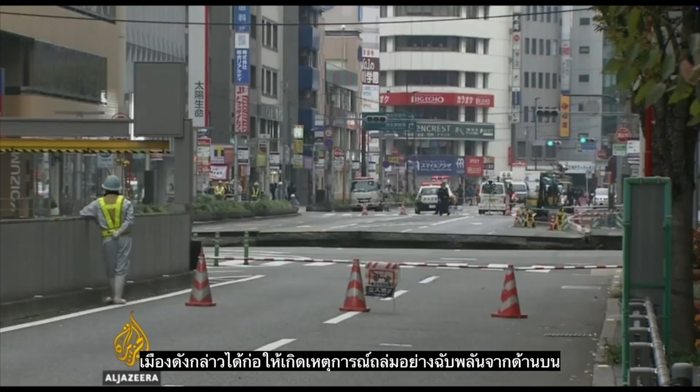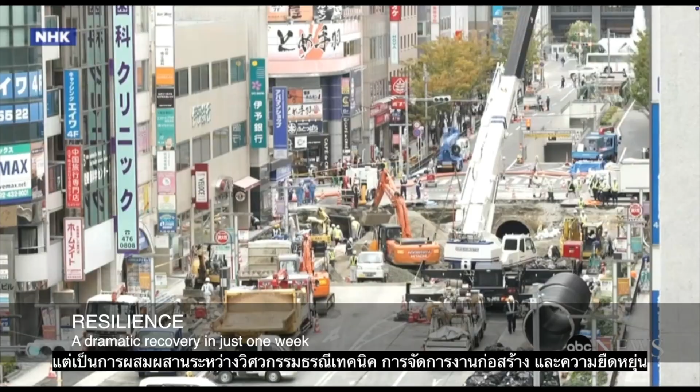In 2016, in Hakata, Fukuoka, Japan, a major road collapse shocked the nation. A tunnel construction zone deep below the city triggered a sudden cave-in above. In seconds, one of the busiest urban spaces was transformed into a crater. And yet, in just 1 week, Japan demonstrated something remarkable, not only emergency response, but the fusion of geotechnical engineering, construction management, and resilience.

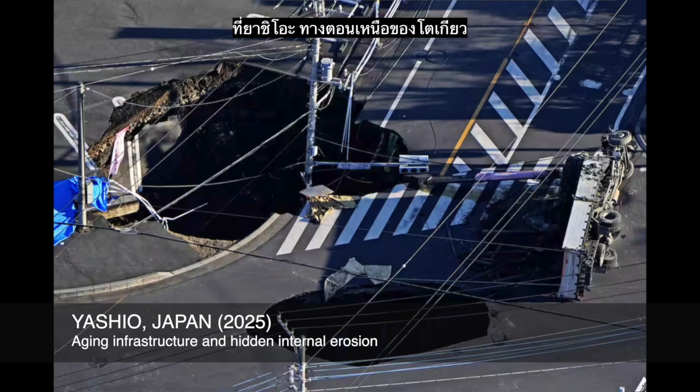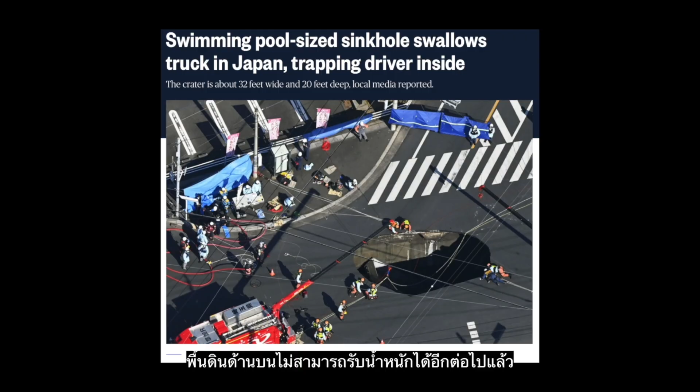But the threat is not limited to construction zones. In Yashio, north of Tokyo, aging underground infrastructure quietly created the conditions for disaster. Erosion advanced in darkness until the ground above could no longer hold. Invisible decay, difficult to predict, devastating when it finally appears. This is the new battlefield facing mature cities around the world.

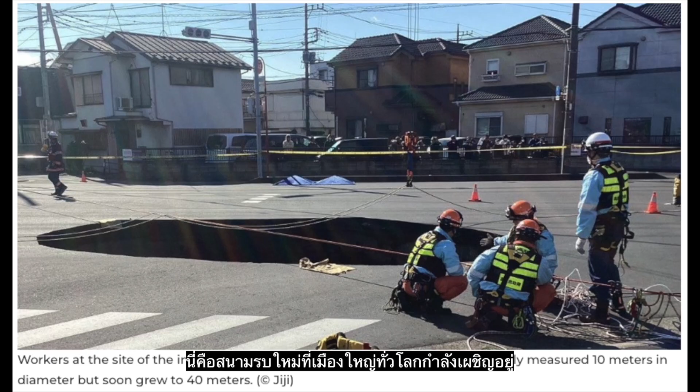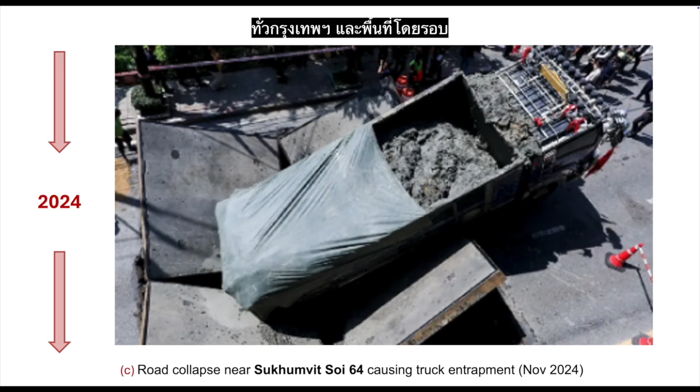And now, the stage moves to Thailand, a nation of rapid growth, complex urban infrastructure, and some of the softest urban ground conditions in the world. Here too, the struggle beneath the surface is intensifying. In Thailand, what we are seeing is not a collection of isolated accidents. It is the emergence of a pattern. Across Bangkok and its surrounding areas, pavement collapse, sinkholes, and road subsidence are appearing again and again, revealing a growing instability beneath one of Southeast Asia's most dynamic urban environments.

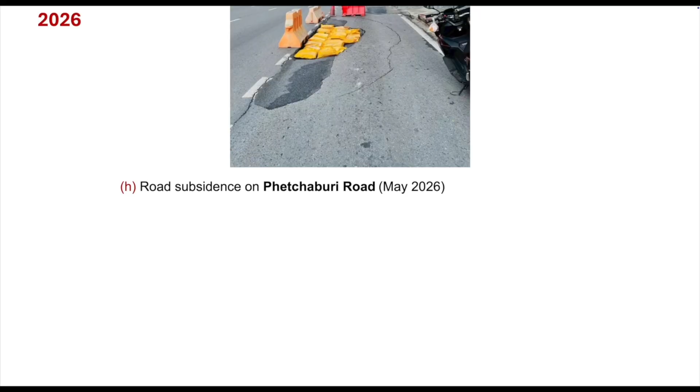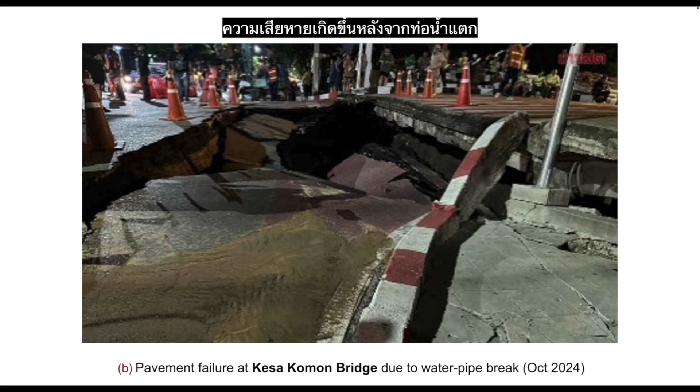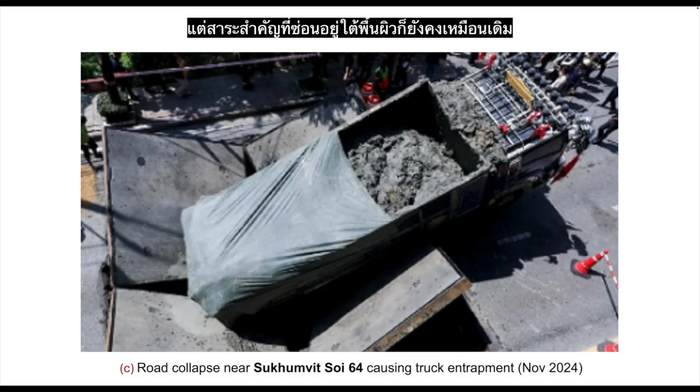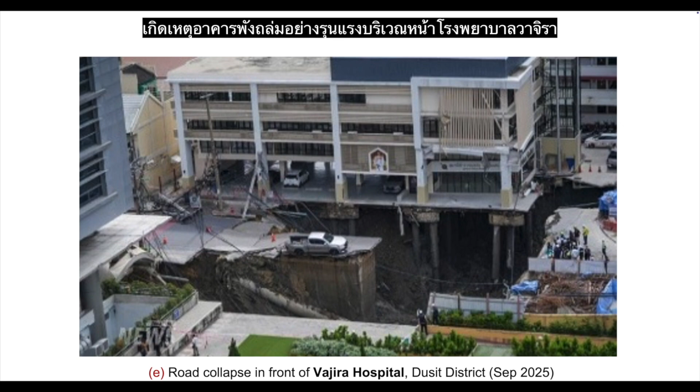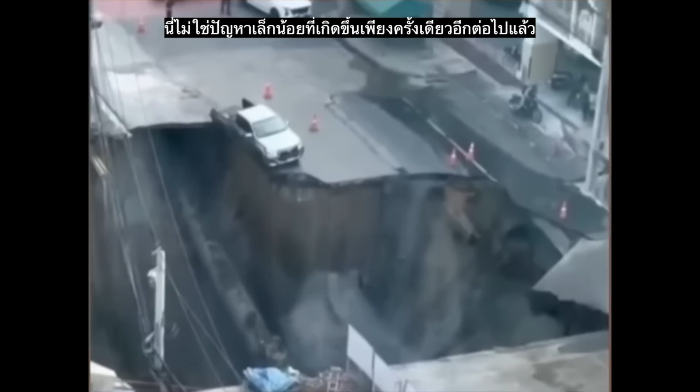In 2025, the consequences became more visible and more serious. A large sinkhole appeared on Chaeng Watthana Road. A dramatic collapse occurred in front of Vajira Hospital, directly affecting a sensitive urban zone. And on Charoen Krung Road, subsidence appeared again near critical utility infrastructure. These were no longer isolated inconveniences. They were urban disruptions with direct implications for safety, mobility, and city operations.

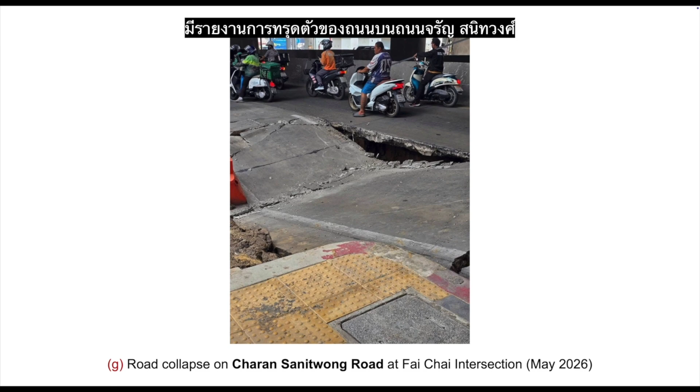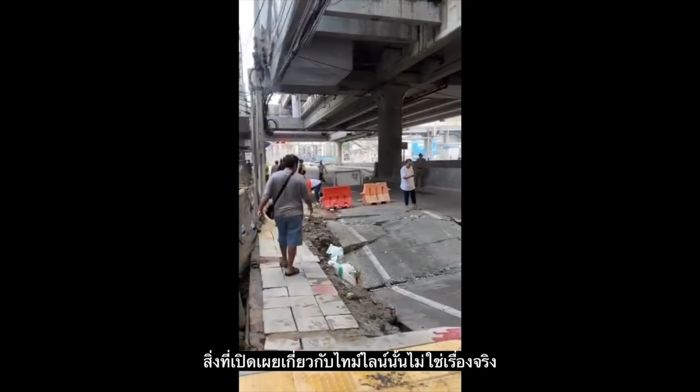In 2026, the pattern did not stop. Road collapse was reported on Charan Sanitwong Road at Fai Chai intersection. Road subsidence also appeared on Phetchaburi Road, one of Bangkok's most important corridors. What this timeline reveals is not only recurrence but escalation. The locations may differ, but the threat is the same: hidden instability beneath roads used by millions of people every day.

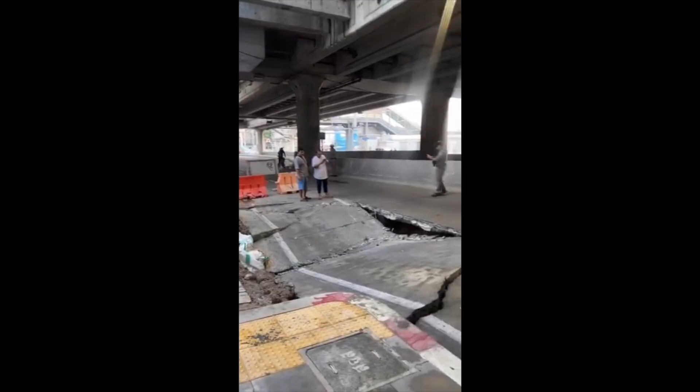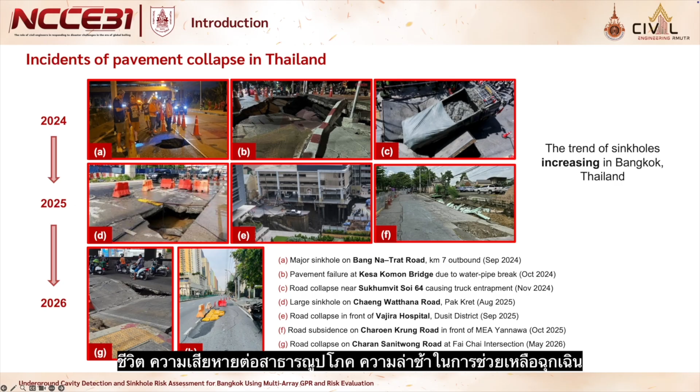These images are more than a record of accidents. They are evidence of a growing urban social issue in Thailand. Every collapse affects more than pavement. It disrupts traffic, threatens human life, damages utilities, delays emergency response, and weakens public confidence in the safety of the city itself. The question is no longer whether subsurface risk matters. The question is whether we can detect danger before the ground gives way. To protect the city above, we must first see beneath the surface.

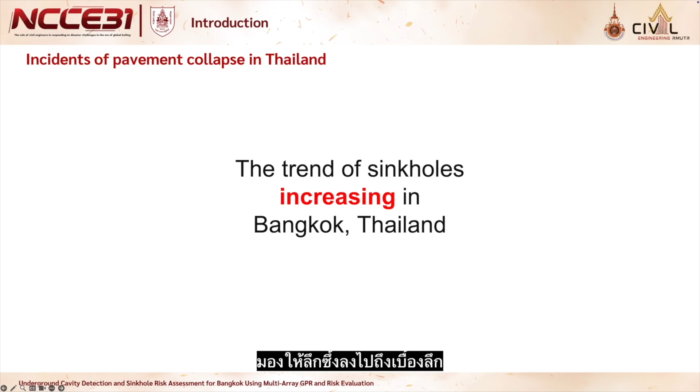What we must protect is not only infrastructure, but the everyday life of the city. What we must build is not only stronger ground, but a more resilient future. Let us begin that discussion today.

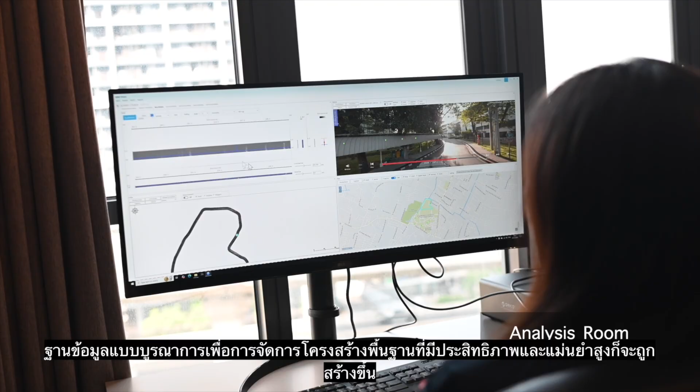The subsurface mapping technology simultaneously captures subsurface data with a GPR and surface data with a 360-degree camera. After both data are synchronized with GPS time, a unified database for efficient and high-precision infrastructure management is created.

The subsurface mapping technology is composed of the GPR, camera, and GNSS, meaning that it can be installed with the same potential on different platforms such as hand-pushed carts, smaller or larger cars. This flexibility allows rapid deployment across diverse urban environments. Feature 1: 3D ground-penetrating radar system with multi-channel antenna arrays.

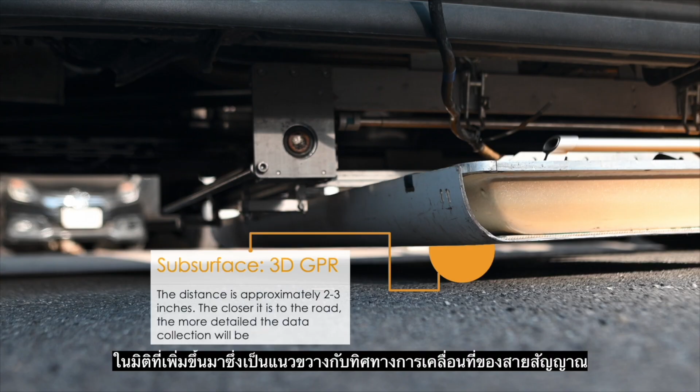Many antennas are aligned transversely to capture data in the additional dimension transversal to the antenna's travel direction. This allows for easy visualization of data in 3 dimensions, since the geometry of features can be seen in a horizontal slice. Cavities and buried pipes, which are difficult to differentiate in single-channel data, are easily identified.

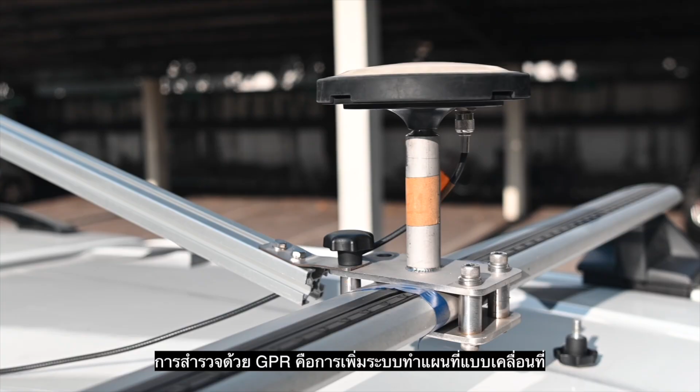Feature 2. Mobile mapping system. The differential of the subsurface mapping technology in GPR survey is the addition of a mobile mapping system, or MMS. The system tracks reference points in the camera imagery to calculate the vehicle's accurate position and trajectory in a method called camera vector. The high-precision camera vector trajectory is then utilized to correct the GPR spatial information data, as well as to create an ortho image of the surveyed road.

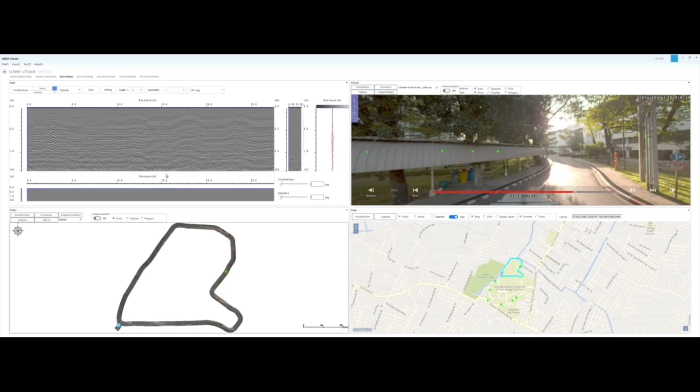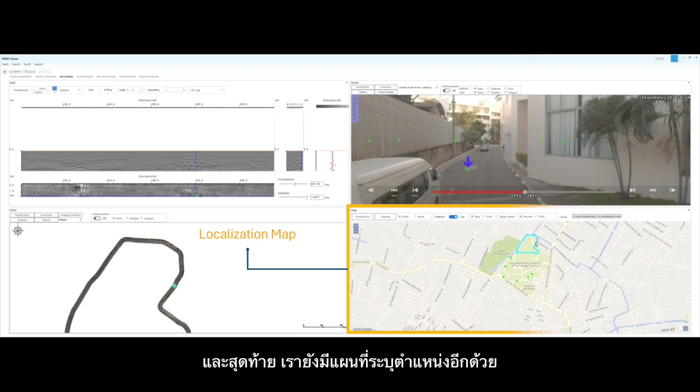Feature 3. Unified terrestrial and subterrestrial data. This is what data visualized in the subsurface mapping technology viewer looks like. At the upper left, we have the GPR subsurface data, next to it the 360-degree camera imagery. At the bottom left, we can see the ortho image created with the camera imagery, and finally, we also have a localization map.

The interesting thing about the viewer is that when checking an exact location in the GPR data shown by these blue cross lines, that same location is also displayed in the camera imagery by this blue arrow and in the ortho image by the blue circle. This ultimately allows for accurate and practical localization of subsurface features as seen from the surface, making it easy to understand where an underground feature is with the use of surface reference points.

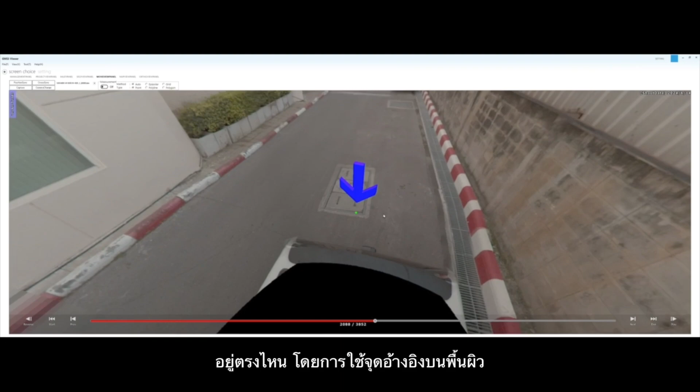Now, let us turn our attention to the practical application of this technology. Recently, we successfully deployed our system in Thailand, a region facing rapid urban development and complex challenges in underground infrastructure. We needed a solution that was non-destructive, highly accurate, and efficient.

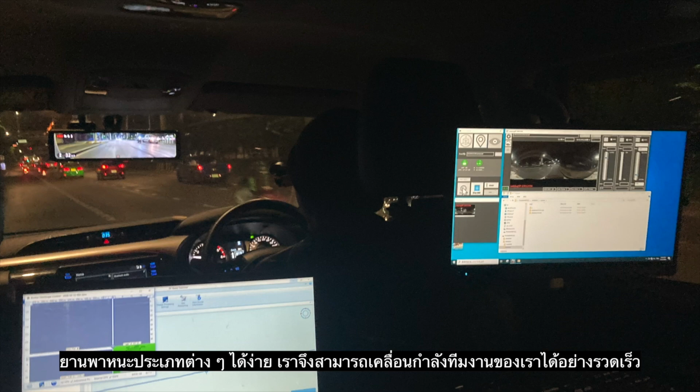As you can see here, the system was mounted on local utility vehicles, scanning kilometers of urban roads seamlessly without causing any major traffic disruptions. Because the subsurface mapping technology easily adapts to different types of vehicles, we were able to quickly mobilize our team and begin large-scale data collection immediately.

Between 2025 and 2026, we surveyed 823 kilometers of roads around Bangkok and discovered 606 potential cavities. By organizing these detected cavities onto a comprehensive map, we are currently conducting heat map research to visually identify and predict high-risk areas. This moves us from reactive response to proactive prevention, knowing where the next sinkhole might appear before it does.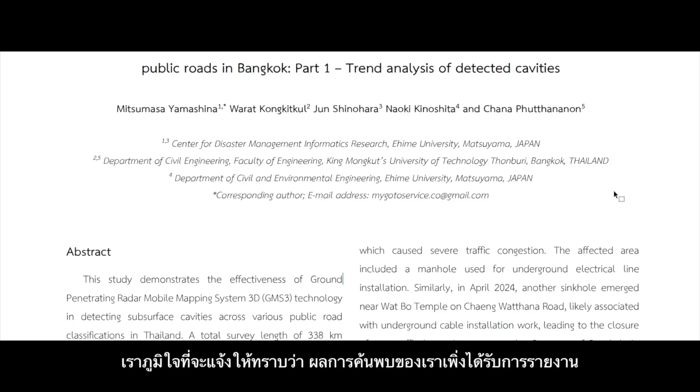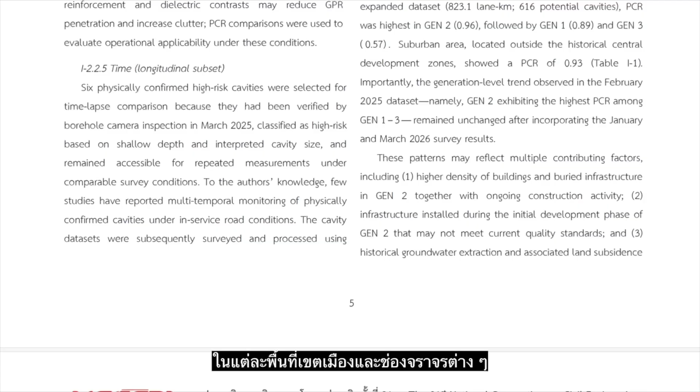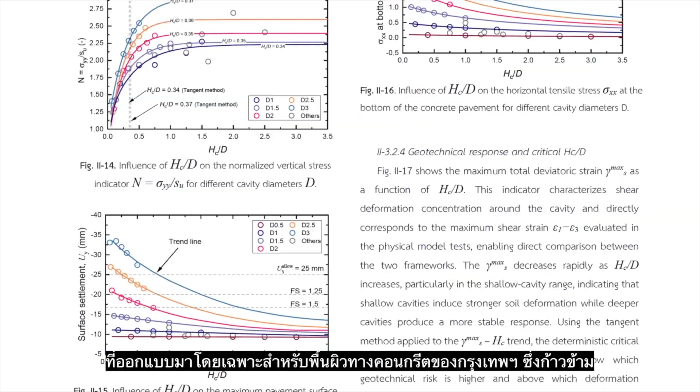We are proud to share that our findings were recently reported at the NCCE31 conference. This landmark study represents the first-ever trend analysis of large-scale cavity investigations in Thailand. Based on a comprehensive 338-kilometer survey, we successfully identified distinct cavity formation trends across different urbanization zones and road lanes. Furthermore, through advanced physical tests and finite element analysis, we are developing a novel risk assessment framework tailored specifically for Bangkok's concrete pavements, moving beyond traditional asphalt-based standards.

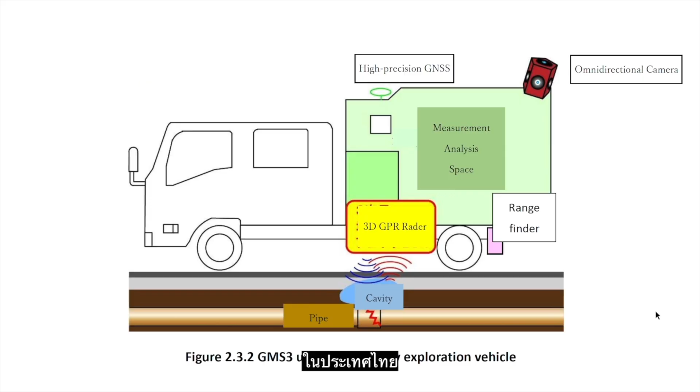Furthermore, we are thrilled to announce the publication of the very first technical standard for underground cavity investigation in Thailand. This groundbreaking document was developed and published based on the successful outcomes of our joint research with Ehime University and King Mongkut's University of Technology Thonburi, or KMUTT. This standard will serve as a vital guideline for standardizing proactive road maintenance and preventing road collapses across the nation.

We will continue to work in collaboration with universities in Thailand and Southeast Asia to address the challenge of promoting the GMS3 technology, which is the most effective solution for preventing cave-ins caused by underground cavities.